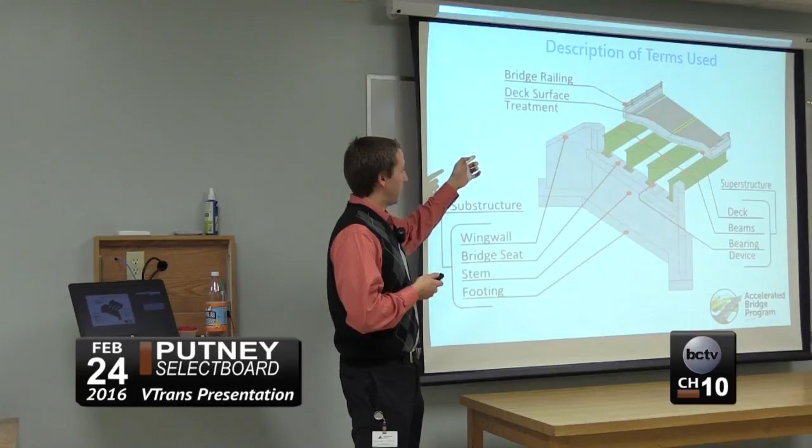We've got a diagram here that shows each part—hopefully the laser pointer works. So we've got our bridge railing, which we'll be discussing, our deck surface treatment, which is our pavement, our deck, and then our beams, often referred to as girders, which rest on bridge seats or bearings. All of that combined makes up the superstructure, which will probably be discussed at some point today. That rests in its entirety on the substructure, made up of wing walls, which will definitely be discussed, and then footings.

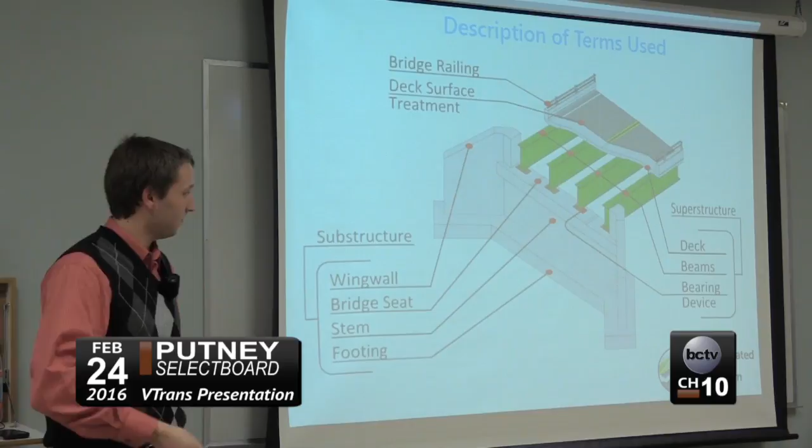If you have any questions, feel free to jump in and ask. Does the town-owned dam to the west have anything to do with the bridge structure at all? No, they're separate.

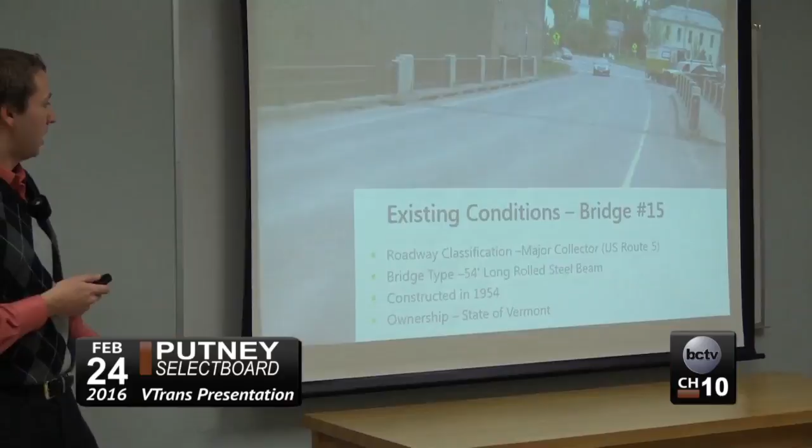So here is a view looking south over the bridge towards the Putney General Store and Kimball Hill. The existing bridge is classified as a major collector on US Route 5. It's a 54-foot long, simple span rolled beam bridge—that's just a standard girder type—constructed in 1954, and it's owned by the state of Vermont, lucky for the town of Putney, so no financial responsibilities, hopefully.

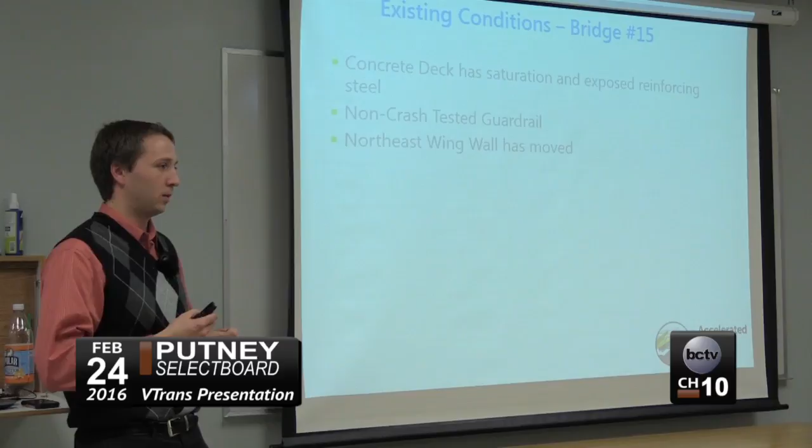The existing bridge is a concrete deck cast in place on the existing steel beams, and it currently has significant saturation and exposed reinforcing, particularly in the fascias. You may have noticed walking over the bridge that there are weep slots or holes in the curb, so any water flowing across the bridge just goes through the curb and over the side. Most of the deterioration and exposed reinforcing is on the outside of the bridge.

It currently has non-crash tested guardrail. I'm sure when it was installed in '54 it met all the design standards of that time, but we have much more stringent safety requirements now, so we'd like to bring that up to code. And then the northeast wing wall has moved—there's a photo, it's displaced 7 inches. It was cast on laid-up stone, and I think some of those stones might have rolled out of place a little bit, so that's something we'd like to address in this project as well.

Can you say what saturation is? Yep, I've got a picture of it coming right up. No, okay, so right here.

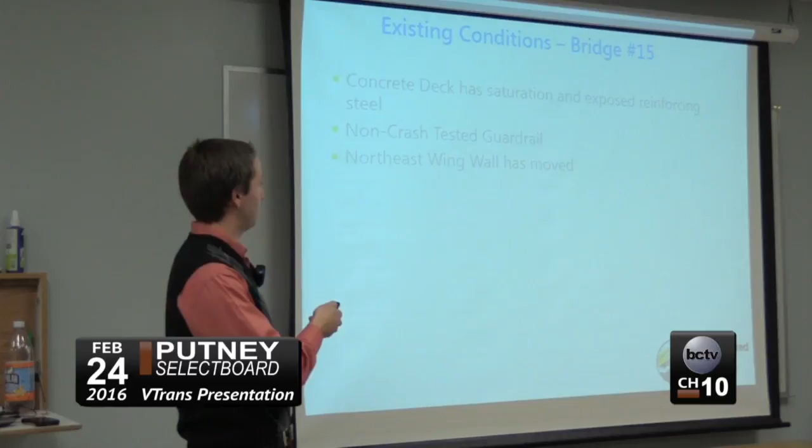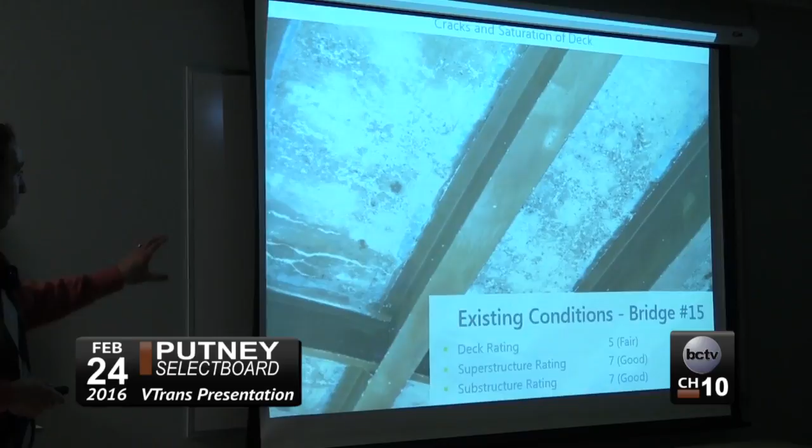All this white here in the concrete is efflorescence. The concrete has become saturated with chlorides and water, so the deck doesn't have the full integrity it once had. There's enough void space in the concrete that water can actually move through it, which is how these chlorides from salting the roads in the winter have gotten here.

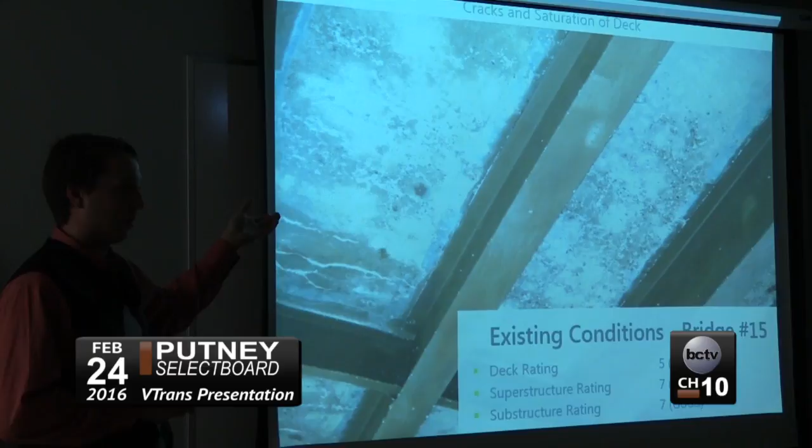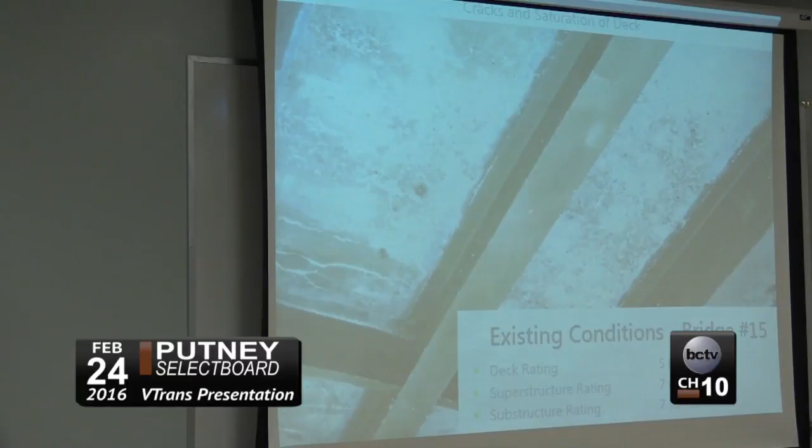An ideal deck basically doesn't allow water to penetrate through it. So if water's getting through it, those chlorides are getting to the reinforcing steel, and it's reducing the capacity of the girder or the deck.

At this time, you can see the beams look like they're in excellent shape, which is why this was identified as a deck replacement candidate.

We've got these ratings down here. Every bridge gets ratings - the deck, the superstructure, the substructure, the channel alignment, everything gets rated by our bridge inspection folks. A 7 is really good. A brand new bridge, if we opened it day one to traffic, never gets rated better than an 8. So 7 is good, 5 is fair. Once you get down to a 3, we're starting to consider closing. 3s are pretty bad, and a 2 would definitely be closed to traffic.

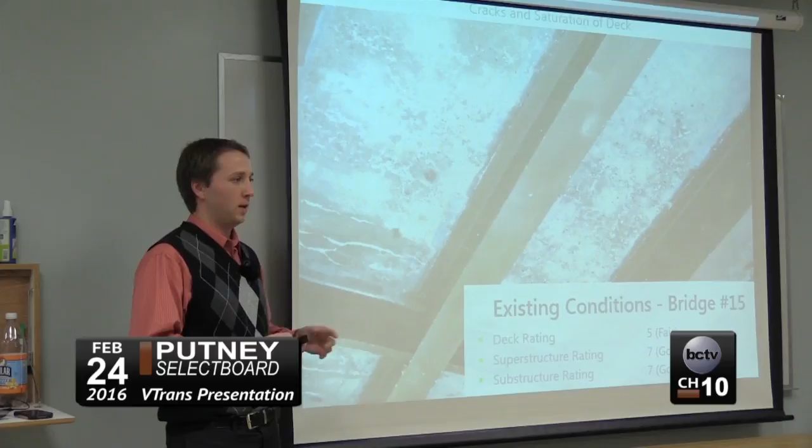So right here, we've got an opportunity to replace the deck and salvage the good condition of these steel girders still. If we were to allow this to continue, allowing chlorides to come through and penetrate the deck, those would eventually get onto the steel and start corroding it, and then we'd be looking at a much larger project than just a deck replacement, which would mean more inconvenience and more cost.

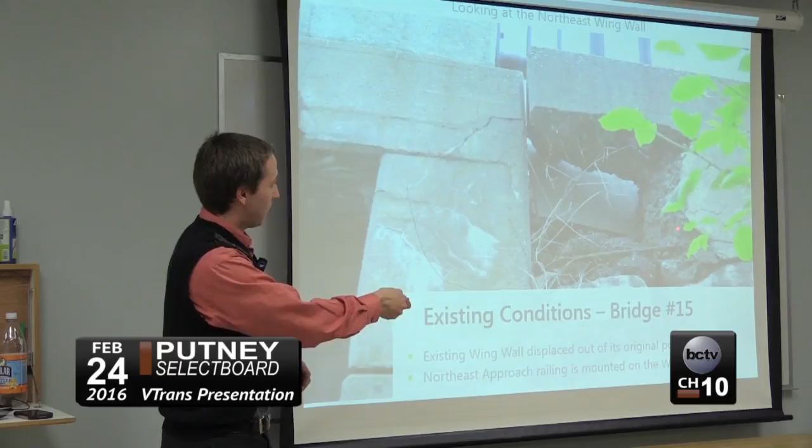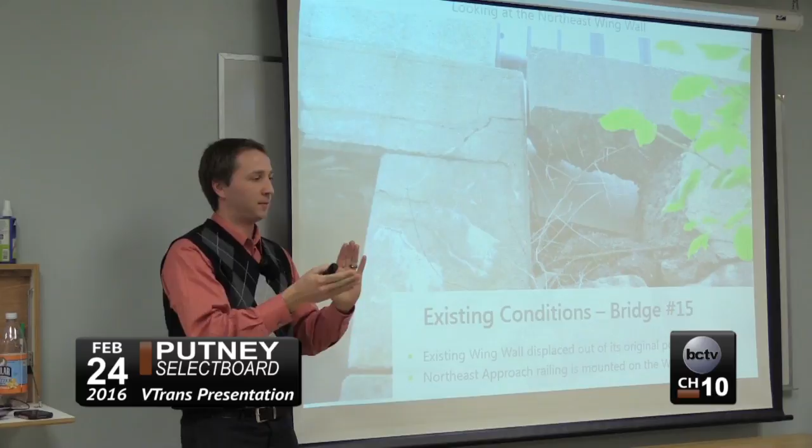So here's the wing wall that's displaced, and as you can see over here in the corner, it's cast on a laid up stone, and part of it's even fallen out. Up here, those were even at one point - the angle is a little bit deceiving. It hasn't uplifted at all, it's actually rotated out, and it was last measured in the most recent bridge inspection at 7 inches.

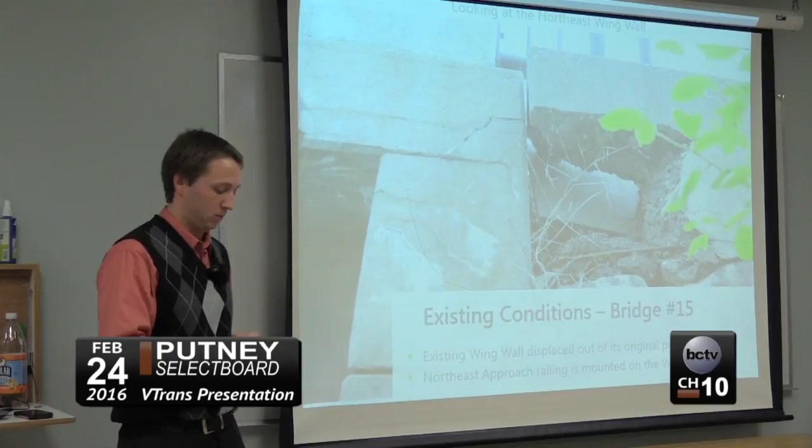And there is railing, I believe, cast on top of that - there's a metal tube railing right on top of that wing wall. So we'd like to fix that as part of this project as well.

So here's our resource constraint. This bridge has historic guardrail on it. As you can see here, the sidewalk and the actual bridge for traffic are two separate structures - there's a 1-inch gap between them, so they behave completely independently. We are only looking at doing work to the vehicular bridge and leaving the pedestrian bridge untouched as the scope of this project.

I don't know if I want to bring Kyle in just to say a little bit about the historic rail. I just want to mention something.

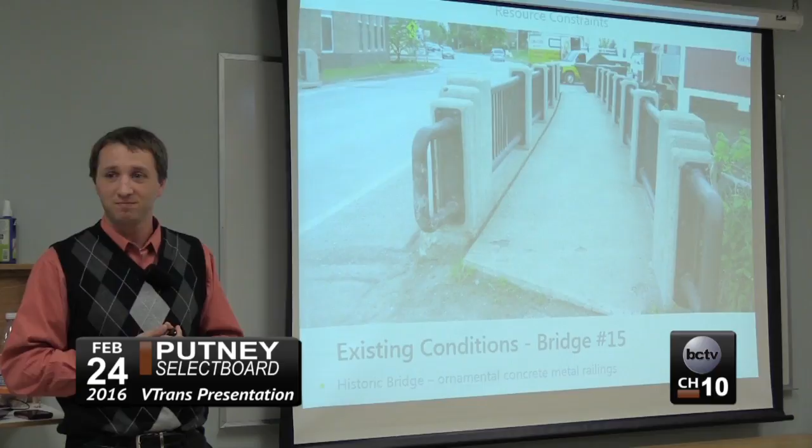Yeah, this bridge is very interesting - I haven't seen this particular railing design anywhere else in Vermont. But really, it's a good example of standardized bridge construction. In Vermont, beginning with the flood of 1927, there was kind of a shift towards standardized bridge design and construction. That trend carried on through the Great Depression and really came into full swing in Vermont with the construction of the interstate. This is just a great example of standardized bridge construction and railing design in Vermont.

Does anyone have any quick questions about the bridge itself, regarding its historic qualities, or anything I can answer right now? The railing is relatively original, as far as sort of 1954 railing - it looks pretty much unchanged from that '53, '54 standardized specification that was included with the original bridge plans. So as far as we can tell, it's pretty intact. When you look at the as-built plans of this, they're identical to what is shown for the original contract of the '53, '54, '55 construction years.

This talked about crash testing the rail - how is that done? So this would not be crash tested. Crash tested rails are built as a full mock-up, full scale. They actually drive a vehicle at a design speed, at an angle, into the guardrail and measure the performance of it - basically the dynamic deflection, and what happens to the car once it impacts the railing.

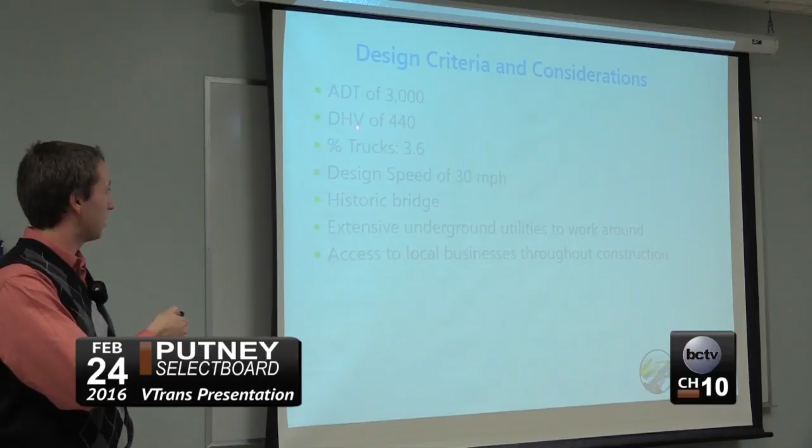So the design criteria that we've had to work with: the ADT, annual daily traffic, or average daily traffic, is 3,000 cars per day. Design hourly volume, DHV, would be the number of cars that travel over this bridge in the peak hour, which would be 440 cars in 1 hour.

The percent trucks is 3.6, it's probably all Soundview, it's all you guys, I'm guessing. I don't know how much more truck traffic there is. And the design speed is 30 miles per hour.

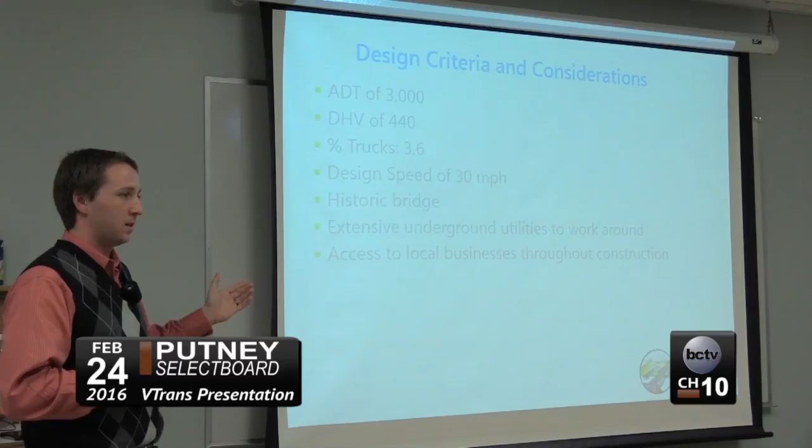Some of the things we've had to consider: this is a historic bridge, so we want to mitigate the loss of the historic railing as much as possible. There's extensive underground utilities that the contractor is going to need to work around, so we have to keep that in mind as we go through our scope. And we want to maintain access to all the local businesses throughout construction, which is really our biggest challenge.

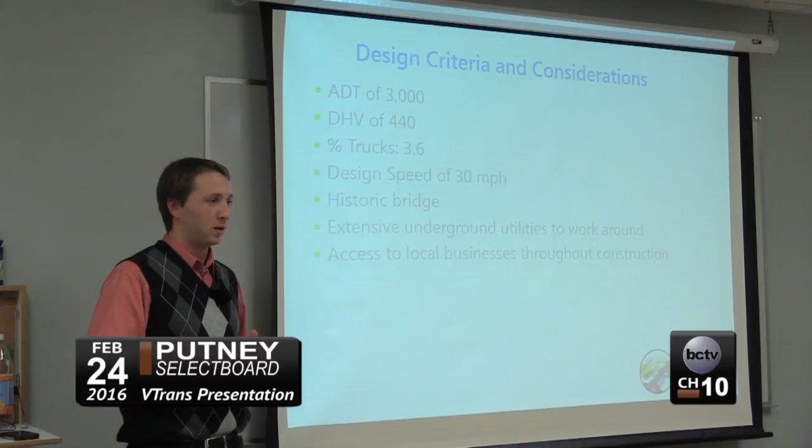So this is the number of cars you're building for, not the number of cars using the bridge right now? This should be the 20 to 25 year forecast. The forecast is almost identical to the current conditions, and I think the reason is the interstate—most through traffic is using the interstate, so the local traffic isn't expected to change a lot.

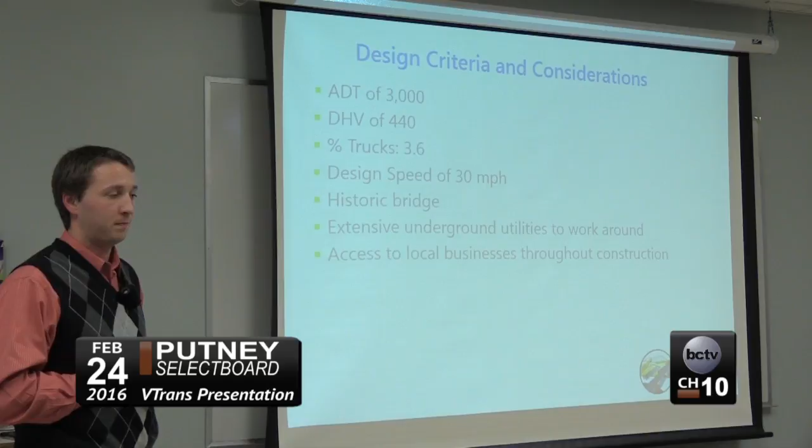Are you going to do any traffic counts of current traffic using Kimball Hill and Sand Hill Road? That's an excellent question, and we're going to get there. Once we get to maintenance of traffic, I'll start talking about that, and I'll hand it off to Jen for that part.

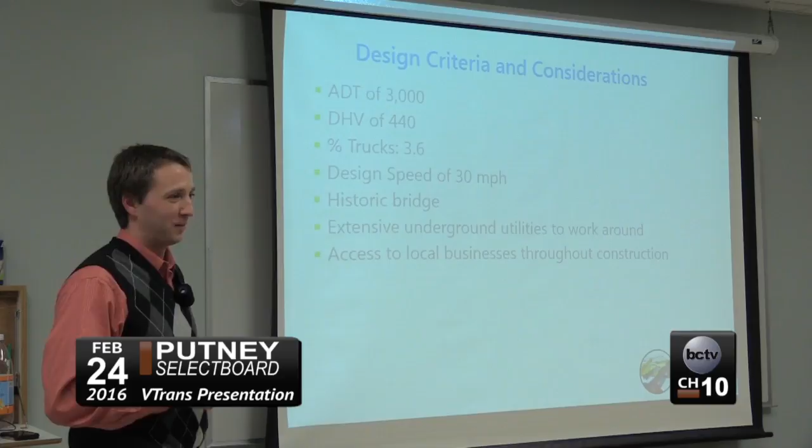So the alternatives we looked at were no action—just leave it as it is right now. How much more life can we get out of it? What are going to be the ramifications if we do that?

We already discussed that if we don't do anything, the bridge deck is going to continue to deteriorate, the chlorides are going to get onto the steel, and we're going to have a larger project in the future. There's likely to be some minor maintenance throughout the next however many years we leave that in place. So we disconsidered that option—we'd rather deal with it now and get the most longevity out of the rest of the structure as possible.

Deck patching: you've seen the photo of the saturation, there's really no place to start and stop. Some decks just have localized deterioration where you can patch one area and the rest is in pretty good shape, so you can limp it along for another 20 years. This one, in this condition, once you start demoing it, there's no good sound concrete to stop at. So this wouldn't be a good option. If we tried it, the repairs being adjacent to less sound concrete would just cause additional deterioration, and it wouldn't last very long—we're estimating about 15 years at the most.

So that left us only with a deck replacement option, as identified by our asset management group. The deck replacement option also includes the wing wall repair and the new concrete railing. So our recommended alternative, logically, is the deck replacement.

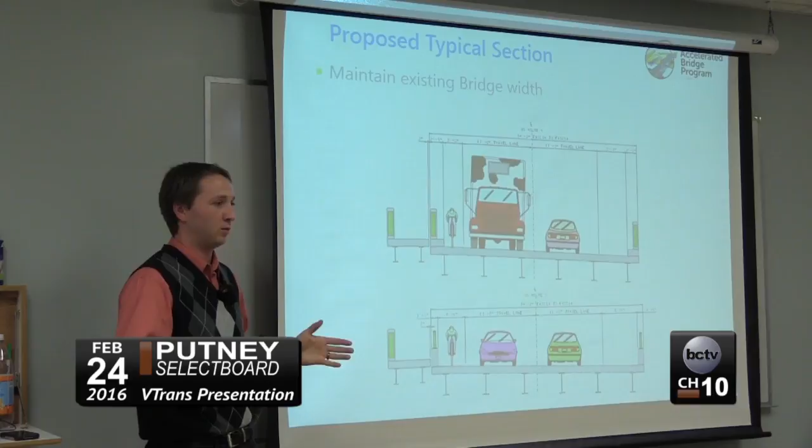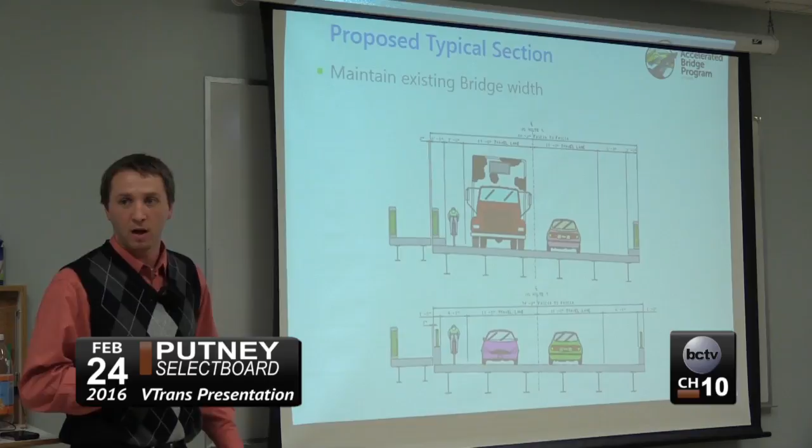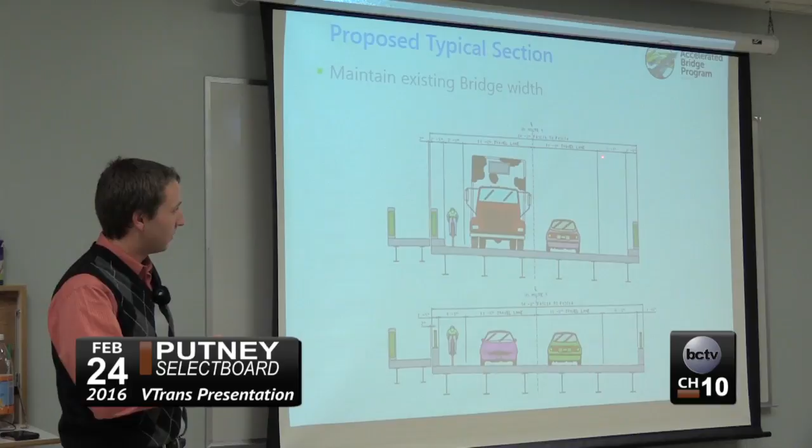This one would have a solid bottom concrete the whole length of the bridge, with parapets, and in between the parapets, full height would be steel tubing. We got some photos of that, he's gonna show you some pictures. But what that does is increase your shoulder widths quite a bit. If you maintain the 11-foot lanes, you go from a 3-foot shoulder to 4'1" and 5'1". This should be 6'2", I believe.

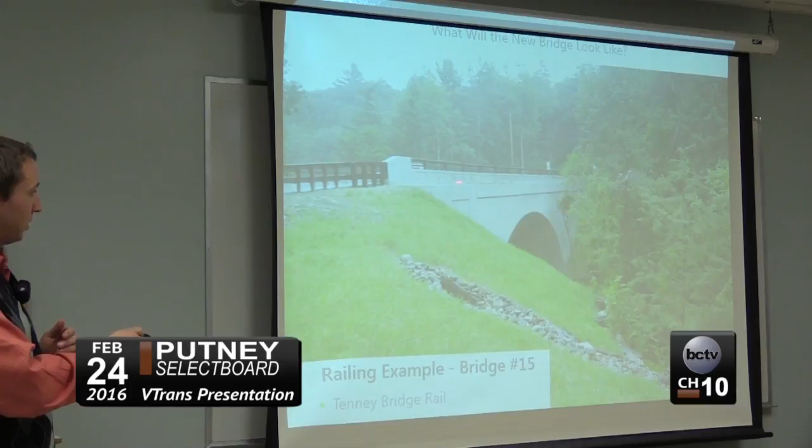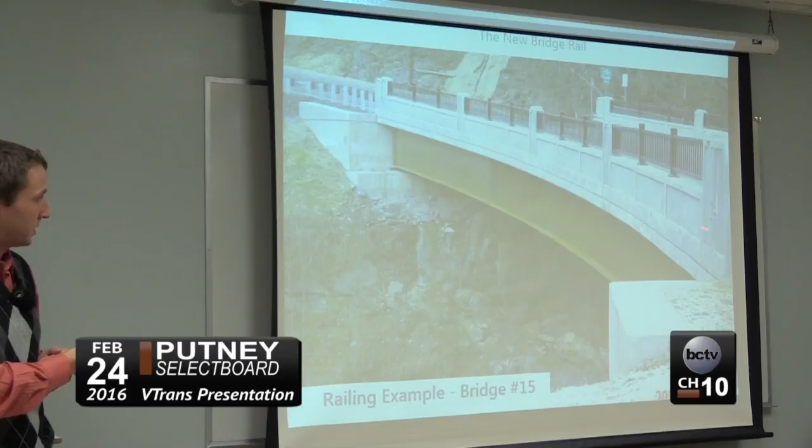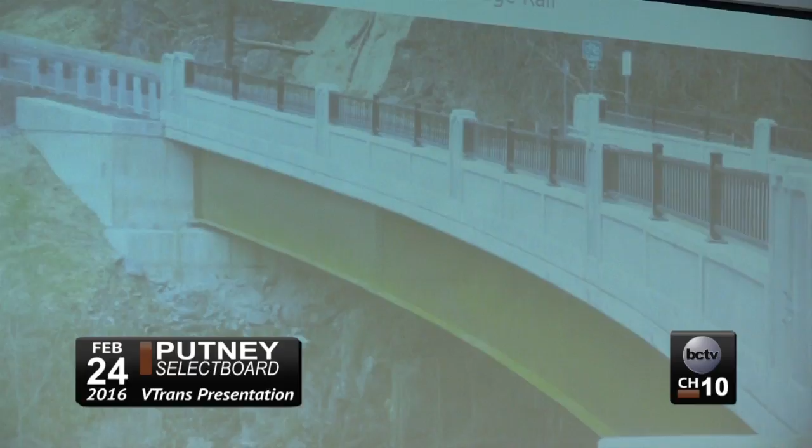And then another one, this one's got concrete parapets with the steel tubing. And then this is the one that we're proposing. So this one has got the concrete along the entire bottom, and as you can see, you've got the concrete parapets every, I believe it's 15 to 20 feet, and the steel, horizontal steel tubing with the vertical spindles. The reason why we picked this one is because we believe it most closely mimics the one that will be left intact, because it's got the combination with concrete and steel.

What's really important here is when we talk about crash tested, it's the concrete. You're gonna have to have the concrete on the bottom, you got no choice on that. That's what keeps you basically from driving out into the river. Once we get past a certain height, I think it's 24 inches of concrete on the bottom, then we can talk about adding a little bit of detail on the top.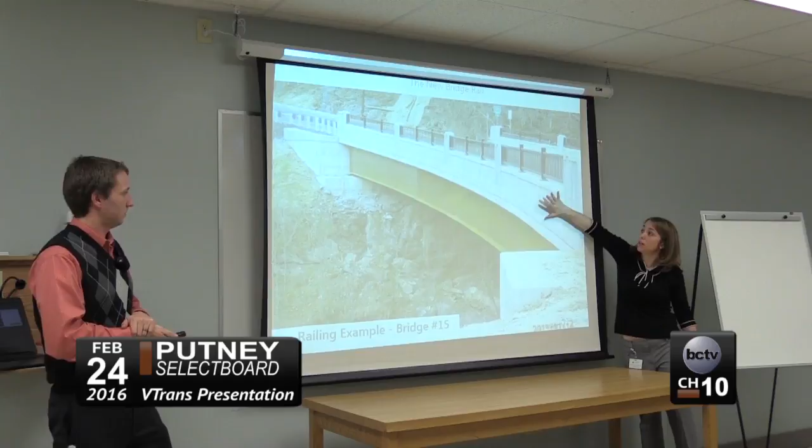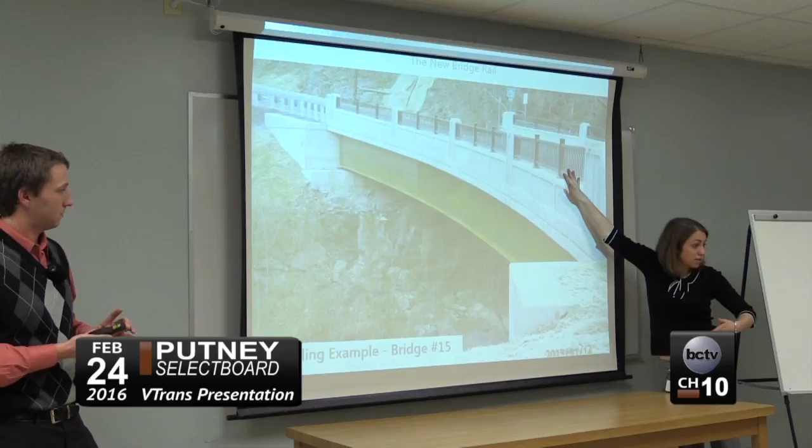That's basically, so what we like about this one - and Kyle can speak to this probably better than I can - is it still kind of mimics that concrete parapet that you currently have, and it also has that vertical steel rail, which is what you have. So again, we're trying to tie it in as much as we can to the existing rail that will be maintained, while providing you something that has the crash testedness down here.

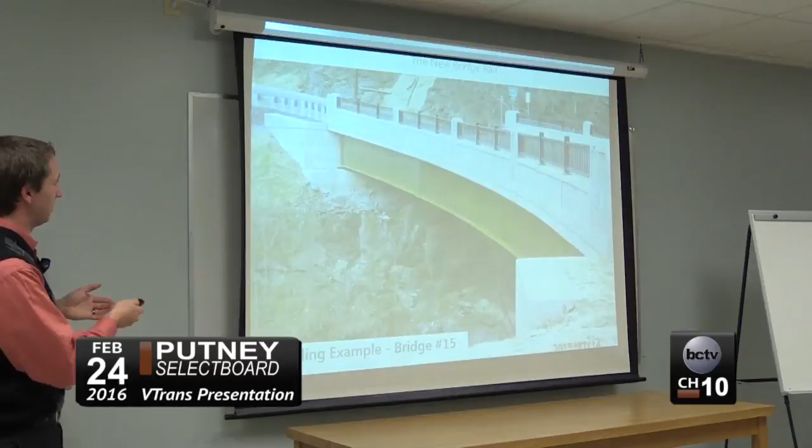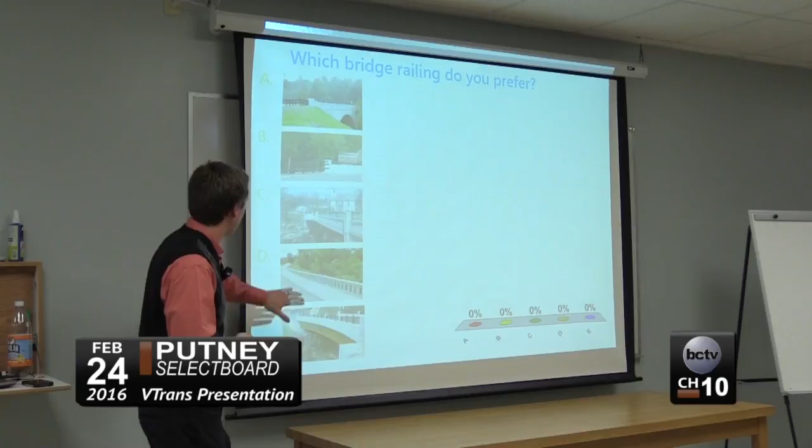So this is our preferred alternative, and we got a question for you after: which bridge railing do you like the best? Now, what's your preferred alternative there? Want to turn off the lights? I can turn the light off for a second.

Starts with A. E is the one that you're proposing - correct. And just so you know, we're not locking in any decisions here tonight, so don't feel like when you vote for something, that's it. Because one of the things that Historic Preservation is gonna do is they're gonna also check in with the town again, along with Rob, just to make sure that, yes, this is the rail we're moving forward with. So don't feel like once you decide tonight, that's it, and we walk away. But this at least helps give us some guidance.

This one's in Barre Town, and it's really nice, right by Booth Brothers. It's a very nice railing. It is a really pretty railing. No pressure - I think you talked them right into it.

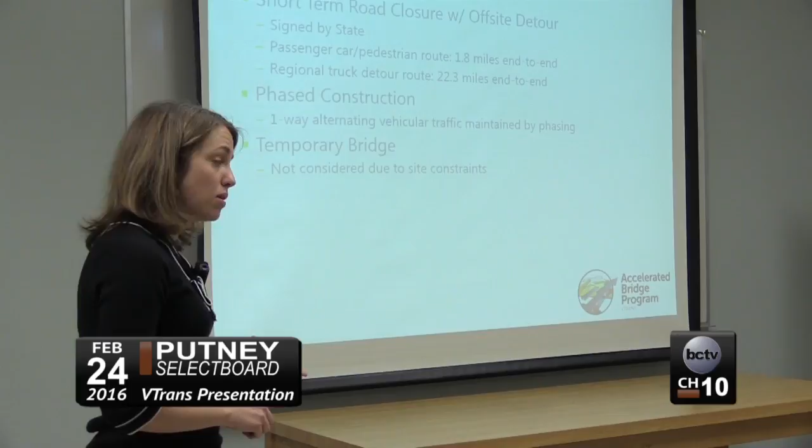So we usually look at three different options as our standard. Those are either road closure, which is our preferred alternative generally speaking, because what we try to do is minimize project impacts, which allows us to streamline project delivery so we deliver projects more quickly at a lower cost. There's sort of a win-win for everybody in that situation, but obviously closing the road is not an option in some locations, depending on how long the detour is, whether there's a local bypass.

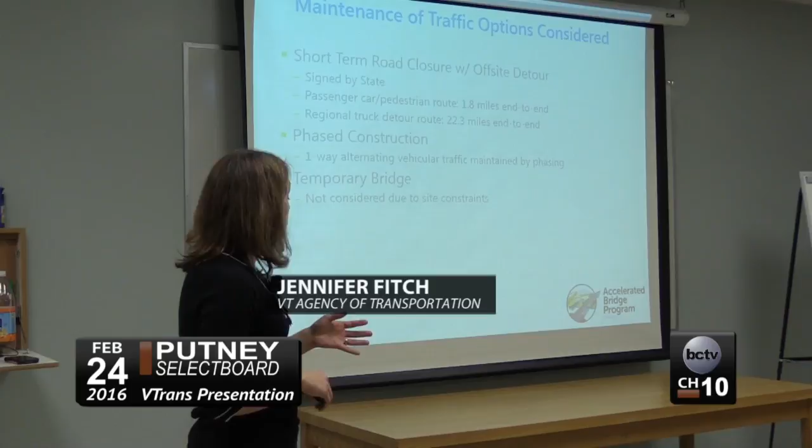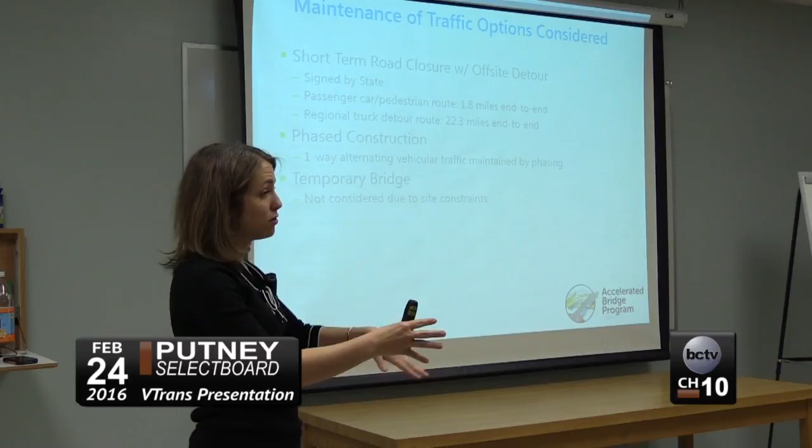Some of the things we'll talk about in a minute. The next thing we look at is phase construction. Phase construction is when we basically take out one lane and have alternating one-way traffic on the other lane while they demo and replace that lane. Then once this lane is back up and running, we switch traffic back over. Now we take this lane out while we have alternating one-way on the other lane and build that one, and eventually open the bridge to two-way, two-lane traffic.

Now the downside of phase construction is that it takes the whole construction season, because you're basically doing things twice. There's also a joint left in between those two lanes, which allows water and chlorides to get in more readily. So usually we see faster deterioration with bridges where we've done phase construction. It's usually the most costly option for us because again you're doing things twice and the contractor's here for about twice the length of time. So those are the reasons why we don't like phase construction, but there are times we have to do it because it's the only option.

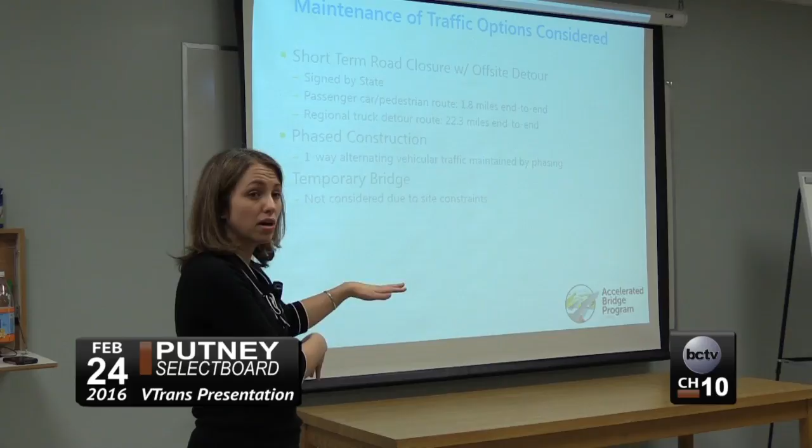The last option we look at is a temporary bridge, where you see a bridge right alongside the existing bridge. We close the existing bridge and reroute traffic onto the temporary one. In this case, we didn't even consider it, for two reasons. One, it's a very tight location—it would be almost impossible to fit a temporary bridge in here. And second, this is considered preventative maintenance, or preserving the bridge, so we're trying to spend less money now to extend the life of the bridge as much as we can. There's really no way to put a temporary bridge in here anyway.

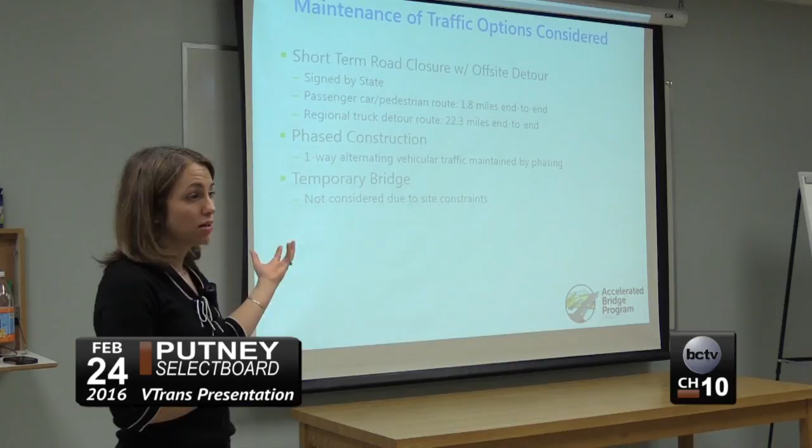So the first thing we looked at is a road closure. As Jonathan said before, we're going to be using precast deck panels—prefabricated bridge components built off-site. We truck them on-site and lift them into place. That allows us to build the bridge quickly; it's accelerated bridge construction, so we can get in and out as fast as possible. Right now, the maximum time we're going to ask from the community is 10 days.

One of the things Rob is going to do when he gets it into design is see if he can reduce the number of days down from 10. We're going to do that if we can. We start with a conservative estimate because we never want to come back to a community and ask for more time—we'd rather come back and say we'll deliver it in less time. So that's a conservative estimate. We're confident we can deliver it in 10 days.

We're also going to incentivize the contract. What that means is we figure out how many days we think it will take to replace the deck, and how many days the contractor, if really working hard, can build it in, and we incentivize him to open the bridge, say, one day early—he gets a 5% bonus on the contract if he does that. The Accelerated Bridge Program has been around for four years, and we've had a 100% success rate with opening all our bridges early, with contractors getting full incentive.

We're happy to pay the contractors more money when they're working hard to open our bridges early. They get compensation, and it's better for the public as well.

There is a regional detour route, which I'm going to show you, and then we'll talk about the local bypass that you were mentioning. Does that include the wing wall repair? Yes, it does, because that seems a little more of a can of worms than just a new deck.

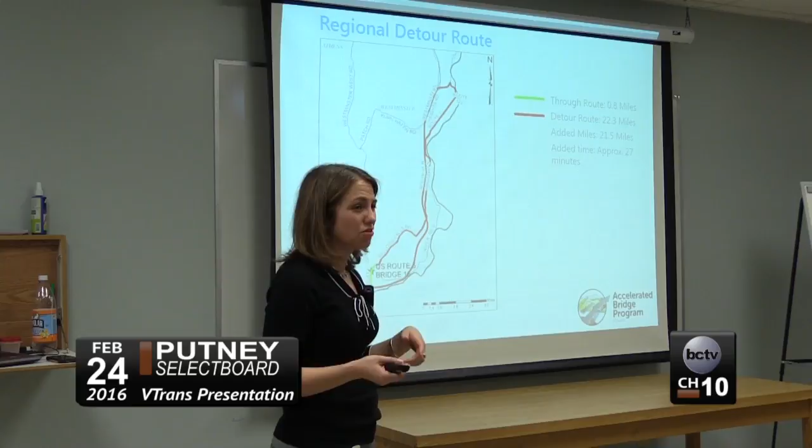That's something the community and Rob will work out during design. Currently, the way our contracts go out, there's a noise ordinance between 9 o'clock at night and 6 o'clock in the morning — they can't go over 75 decibels, which is actually pretty low. So usually at night, if they're working under that noise restriction, they're just kind of cleaning up the site, because there's not a lot of other work they can do without going over that noise ordinance.

So here's the regional detour. A lot of times we refer to the regional detour as the truck detour. We'll talk about that because we definitely do not want trucks using the town's local bypasses. In this case, the truck detour route is 22.3 miles, and it adds about 27 minutes to travel time. This is what I'd consider a moderate detour length for us.

We've certainly done longer detours than this in the state. The downside of the state of Vermont is we don't have a lot of roads, so unfortunately that usually means our detours are pretty long.

This is a moderate detour route, which we'll talk about as a potential local bypass. This is the one we looked at as the shortest local bypass in town. You can see it's Kimball Hill Road up to Westminster Road, Sand Hill down to US Route 5. Here's Basketville right here.

Did I say it wrong? Well, Sackett's Brook is... Sand Hill is that road right there. The road is Sand Hill. Oh, okay, I apologize, I'm not local. I'm not from here, you can tell.

Cynthia had a very good question: how do local bypasses work? So this is the answer.

We come to the town, and Rob will do this during final design or at contract phase, and he'll ask where you want your local bypass to be. We recognize, the state recognizes, that local people in the town are not going to take the 22-mile detour. We know that's going to happen. We will never sign the local bypass, we will never promote it. You're not going to hear anything about the local bypass from the state of Vermont, from our contractor, or from our project outreach coordinator. No one's going to talk about it, okay?

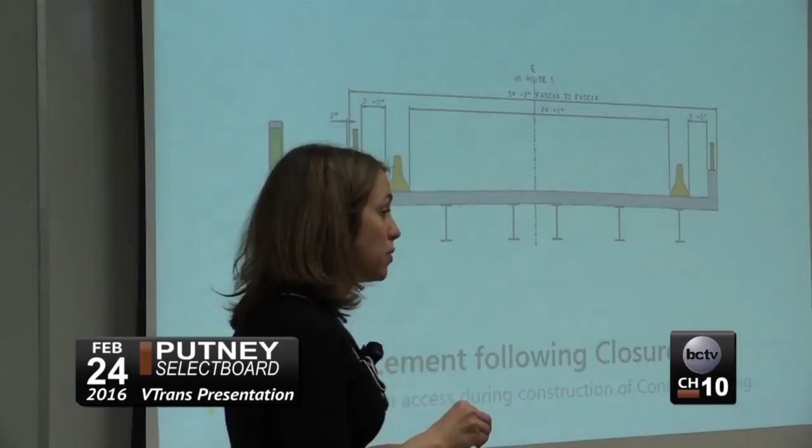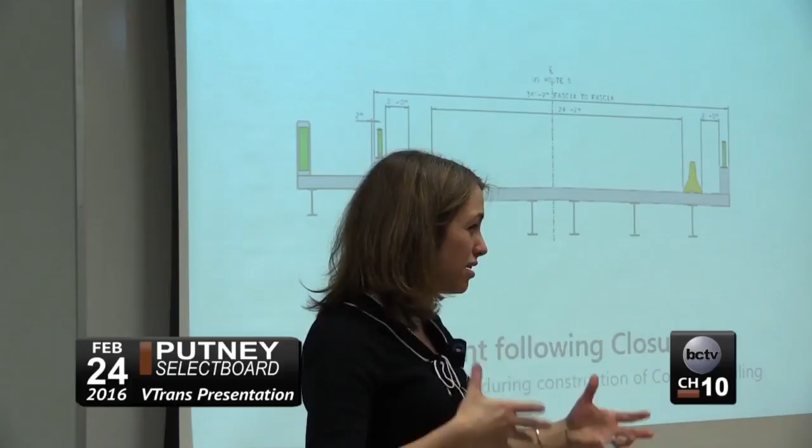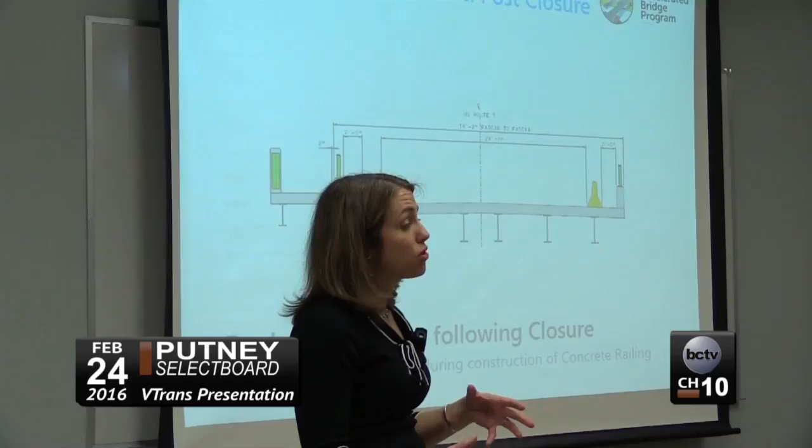One great thing I want to mention is how closures normally work in a standard project: we allow one-way alternating traffic for 2 weeks prior to the closure so the contractor can do prep work and get equipment into place. Then we close the bridge for whatever duration is needed, and typically allow 2 more weeks of alternating one-way traffic afterward to button up things on site that couldn't be finished during the closure.

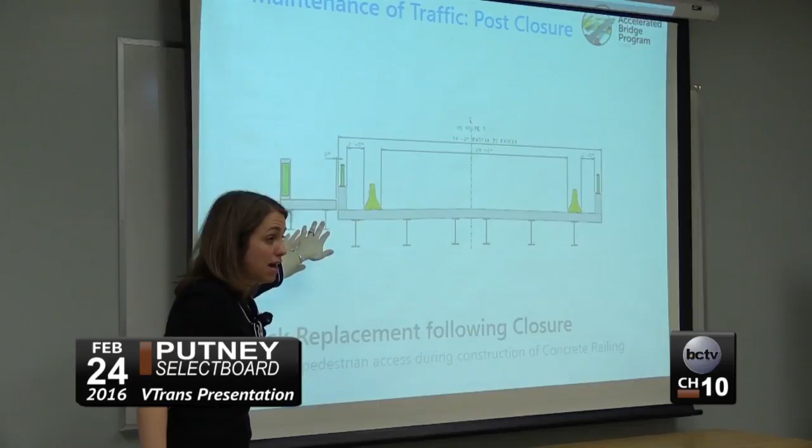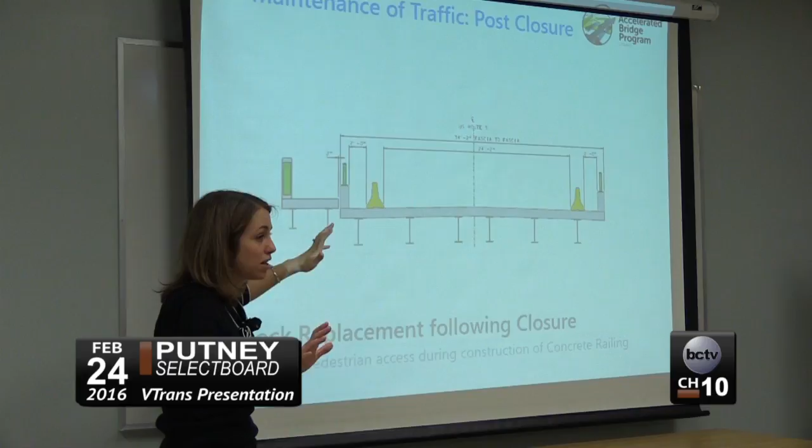In this case, all the deck elements will be precast, but the rail itself has to be cast in place because you can't precast it. We're on a curve—it's pretty, but it would be very difficult to cast that at a plant, bring it to site, and make the connection. So this will be cast in place, meaning the contractor will be around a little longer since he's doing this work while on site.

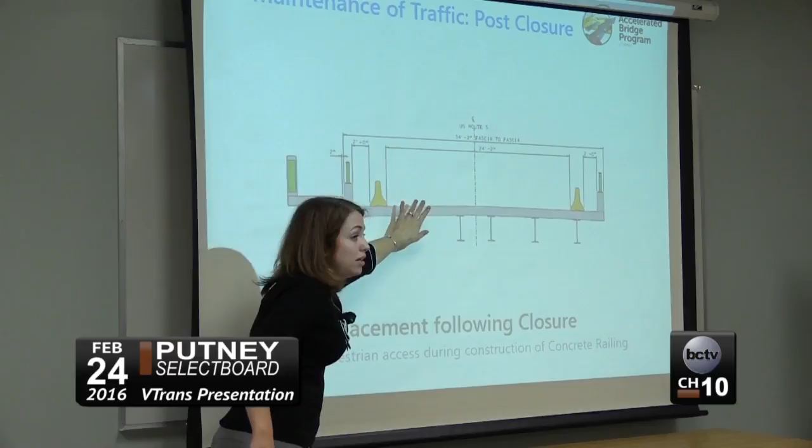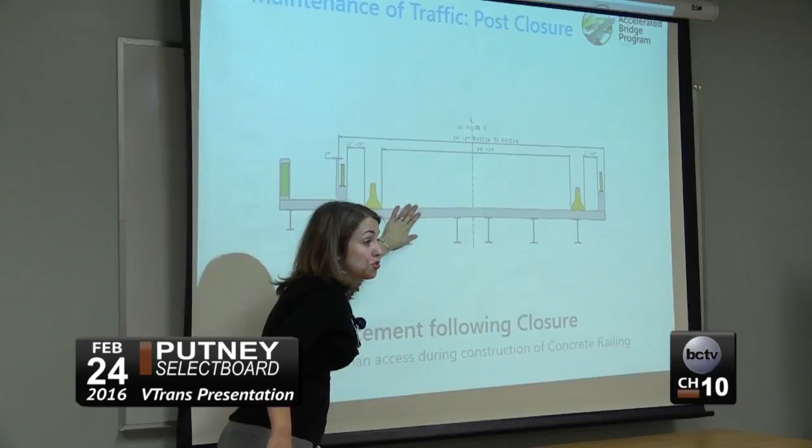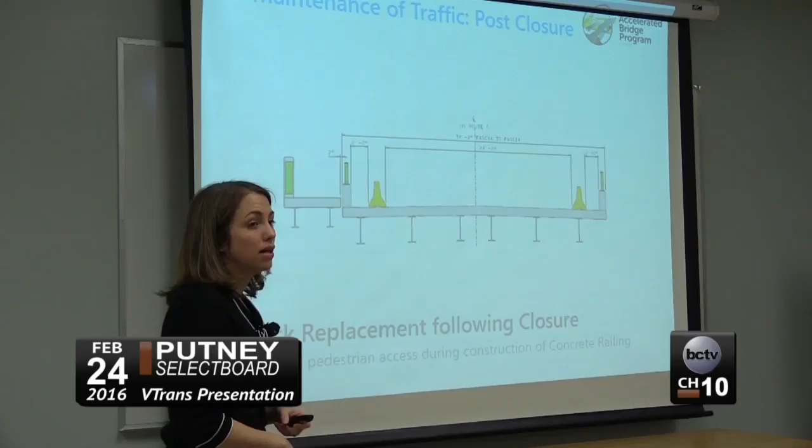However, we luckily have the width. The great thing is we can do the rail while maintaining two-way traffic, which is great because in most cases we can't—our bridges are too narrow to allow that. So we'll be able to open up to two-way, two-lane traffic earlier than we normally would. Rob may still need a little time at the end of the detour for alternating one-way, but I think we should be able to open to two-way pretty quickly.

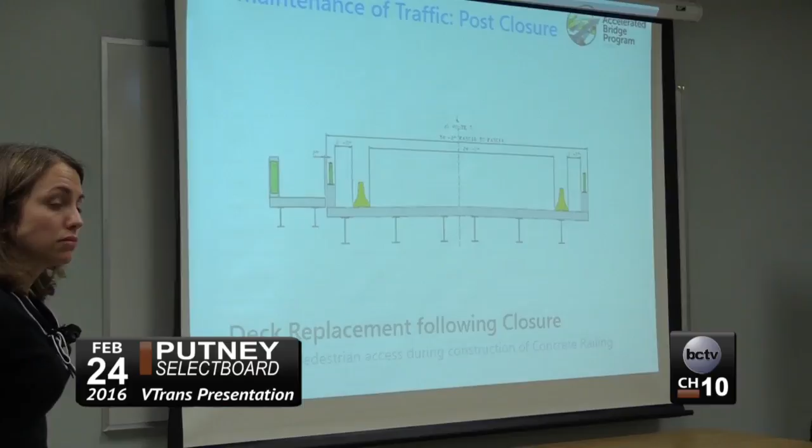I think the scope of this is pretty small. The 2 weeks before may be likely, but afterward I don't see much disruption. A lot of times we're doing other work, but in this case it'd be mostly 2 lanes after the fact—they could do most of the concrete work on the side. The day the concrete truck comes in there'll be a limited pour time, but minimal impact after. In most towns I can't say that, but in this one I can. So again, we're trying to minimize impacts.

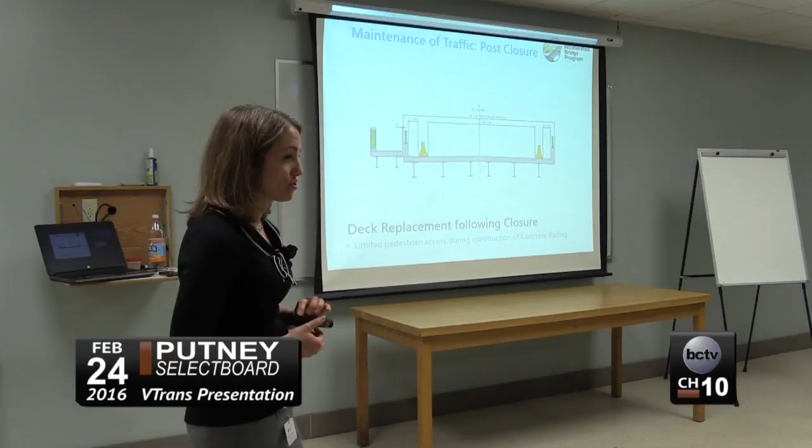Is foot traffic going to be allowed at all? That's a very good question. During the closure period, we are not going to allow pedestrians on the sidewalk, because it's a safety hazard. During demolition and placement of the precast panels, they're flying big pieces of concrete in the air. We don't want anyone walking on the bridge and getting hit in the head with a piece of precast—they'll die. We don't want that to happen.

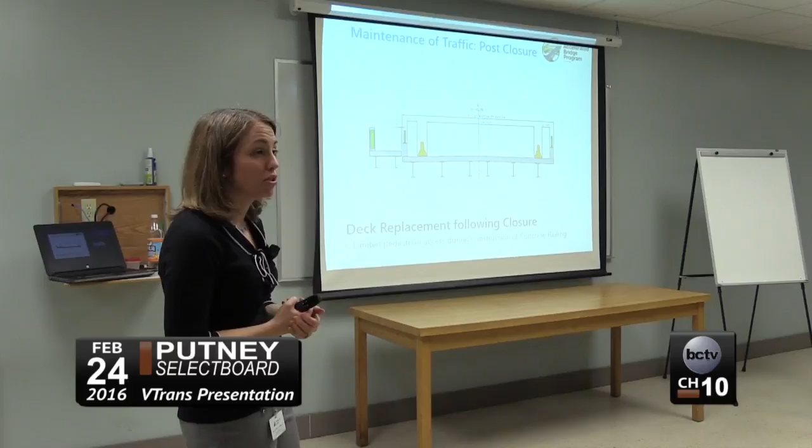So we are going to close the sidewalk for 10 days, but one thing we'll be doing this summer is the RPC doing pedestrian counts. If we find ped counts are high, we can provide a bus, or work with Landmark to fund a van to shuttle people around—especially if it falls during a time with students on campus. There are different ways we can mitigate pedestrian movements. It all depends on the usage data, which will help us figure out what we need to do.

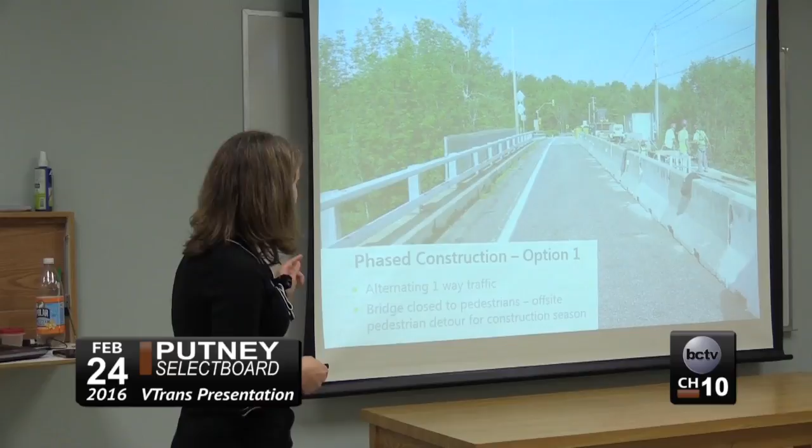I am going to show you phased construction as well, just so you can see what that looks like. You can see they've got this lane open for alternating one-way traffic, while the contractors work on the other side. This would be 2 phases. In Phase 1, traffic would be shifted over while they work on the other lane, and in Phase 2, this lane would be done—that's the one they'd be working on.

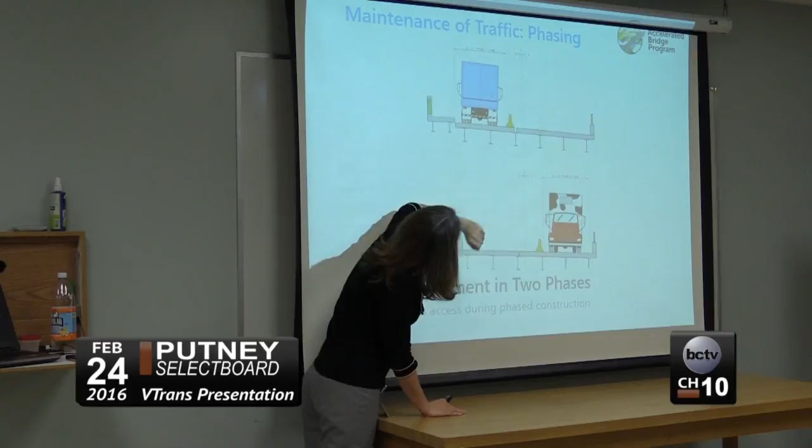So traffic would be on this one, they take that out, and they put the new deck in. Then the second phase is they would shift traffic over into the new lane that was just built, and they would be working on this lane.

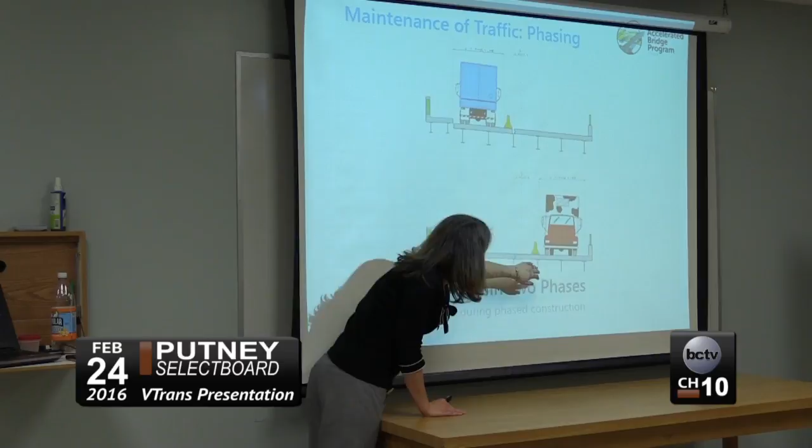And phase 1 would be challenging to allow for pedestrian traffic again, because you'll notice on the top table that we remove the railing in order to allow to get the trucks over there.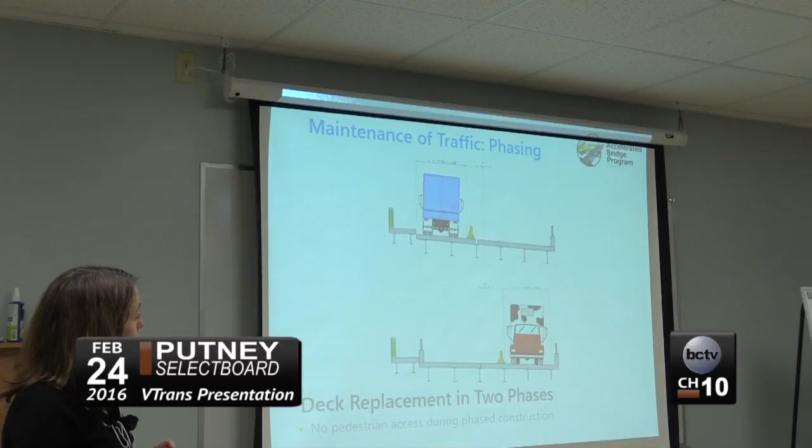One of the options we were looking at is putting the Jersey barrier on the pedestrian bridge, just as a visual aid and cue to keep trucks from getting over there. If we did that, that doesn't leave much space for pedestrians. So phasing, we would still have big impacts to the pedestrian traffic as well.

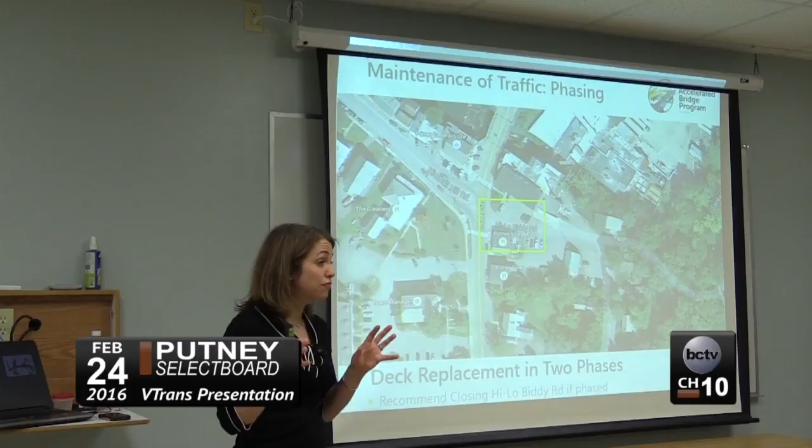The other thing we wanted to mention is with phased construction, now we have to control the flow of traffic over the bridge. In your particular situation, you've got an intersection on one side of the bridge, which does not make maintaining traffic on this side of the bridge easy, which basically means we have to have lights, and those lights are going to have phases, to allow one stream of traffic to move at a time. What happens is your light turns green, you go, and then the light turns red, but you still have to let that traffic clear before the other light can turn green. So there are delays associated with phased construction and with signals.

We would propose to close Hi-Lo Biddy Road during phased construction because what we're trying to do is eliminate as many turning movements as possible, because the more movements we have, the more phases we have, and the longer people are waiting for that green light, because we have more lights.

So we would propose to close this road, and then you'd have to have a signal for here, and you've got a signal on the other side, because you've got people on the other side of the bridge. So you're looking at multiple phases to try to move traffic in and out of that intersection and over the bridge, which all just means delays. It means you're sitting there in traffic, is what it means.

So here's a diagram of phased construction to show you kind of what it would look like. We did talk to Brian at Soundview earlier today. Traffic coming out from Water Street is going to be difficult no matter what we do. It's going to be really tight if we do phased construction.

I can show you the truck turning movements, I have them at the end, but basically they're going to be rubbing up against this rail right here, and there could be possible conflicts. He has to have a really good driver to not hit this rail. Same thing on this side, when we pull the truck through, he's going to potentially be rubbing on this rail as well, so those are considerations for that.

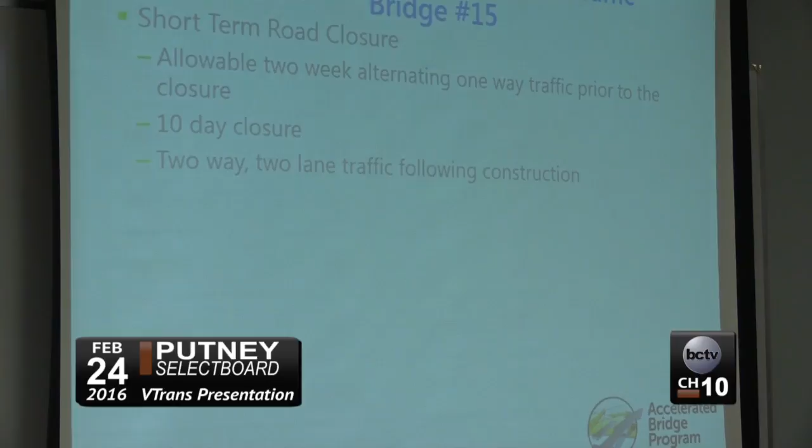So we're recommending the short-term closure because basically we want to get in and we want to get out. We want to get out of this town as fast as possible. You're going to want to get us out of your hair too, and we believe this is the best approach to the project. So again, we would allow potentially for that 2-week alternating one way, but Rob would work on that prior to the closure period. You'd have your 10-day closure, and then we try to open it to two-lane traffic as quickly as we can after the bridge is open.

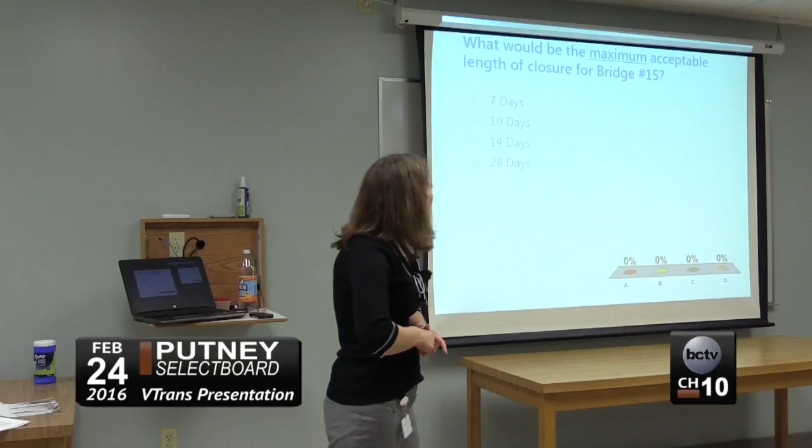So here's a good question for you guys. What is the maximum acceptable length of the closure period? I don't see a zero up there.

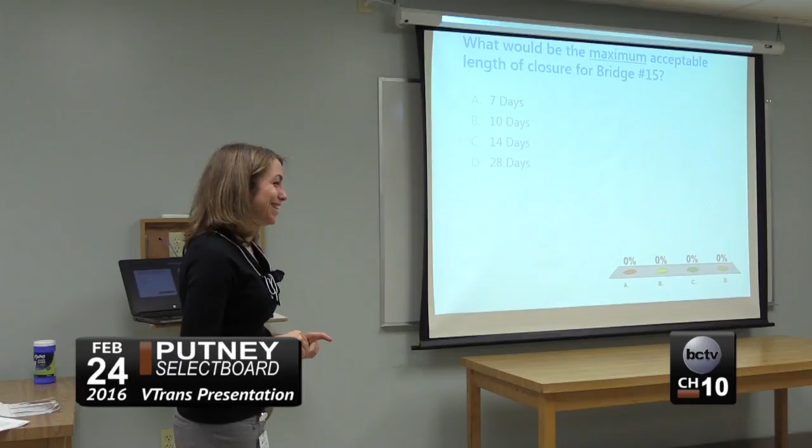I guess that's the prerogative of the person asking the question. We're gonna, feel free to ask questions or talk to us about concerns. And that's my concern. So you are, which owner again? Help me out. I have interest in 3, 7, and 8 Bellows Falls Road, Basketville, in that area. Okay, are you the one that was the owner of Basketville? Well, it's a family business. Okay, no, that's fine. I'm just trying to get an orientation again because I met quite a few people.

So I will show you the turning movements for both, I'll bring that up at the end. And again, this isn't locking anything in. This is just getting a feeling from the folks that are in the audience.

My concern is that probably 999 of 1,000 customers are coming north, and they're going to come to that bridge, and they're going to turn around and go back. Oh, so you're concerned about business loss? Oh, yeah. Okay.

That's a pretty typical standard concern that we get when we do closures. We certainly do closures in downtown all the time. So one of the things we didn't talk about is the closure period can really occur whenever the community wants to have this closure.

The nice thing in this case is we have no in-stream work windows because we're not getting into the water, which usually restricts us to July and August. The other thing is school buses also restrict us—a lot of school buses use the routes we're going to close, so we work with the school systems to figure out, could you take the local bypass? Are you willing to accommodate?

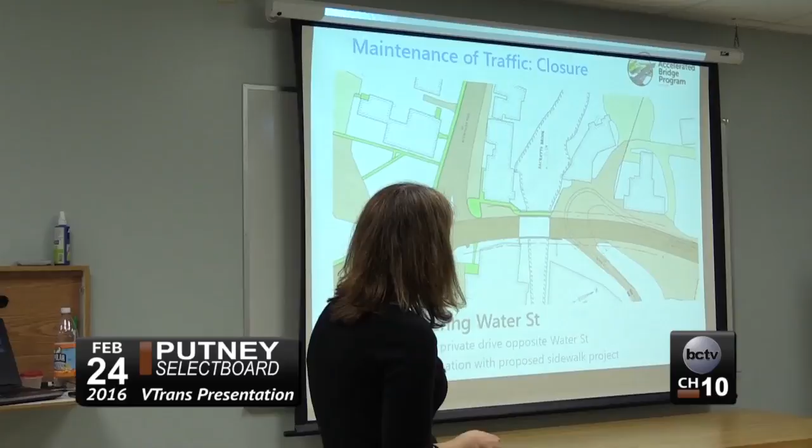These are the turning movements we modeled, using a WB-67, basically the largest truck we can model that's out and available. You can see as the paper company folks pull in, they have to swing into this parking lot and drive down. Same thing when they're pulling out—there'll be a slight impact as well.

Because the truck is pulling onto somebody else's property, there'll be right-of-way compensation for that. For the folks that occupy this building, we recognize there are parking spaces, so they will be compensated for that as well.

There's also a sidewalk project currently planned. If we go with the closure option, they're going to take the sidewalk part out of Putney's project and absorb it into our project, with the state paying for it—no match required from the town. So there's a little benefit: a free portion of sidewalk.

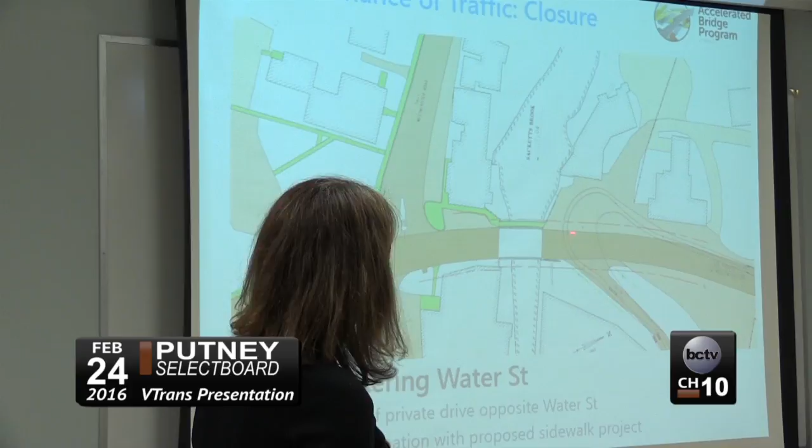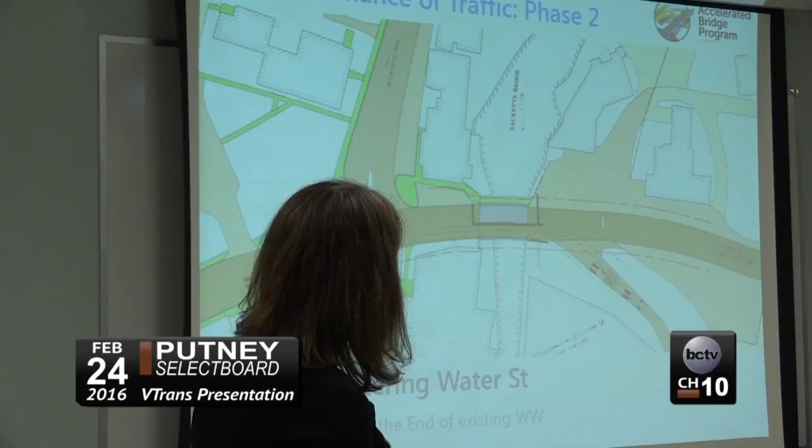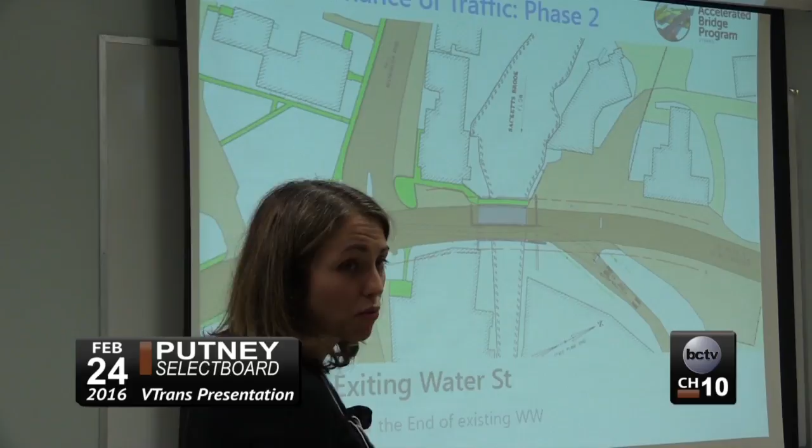Same thing when he pulls out, he's got the same issue rubbing right up against that rail. Same with the second phase—driving in, he's pushed up against that rail, and especially pulling out, he's clipping that corner. We're modeling this in software, so it's not necessarily ideal or perfect, but this is what we use to look at turning movements.

Can I add one thing—does this demonstrate that it's actually possible? This is a conservative truck. See that right there? The way it's modeled right now, it is not possible for phasing.

If we choose the phasing option, we'd have to refine the analysis and possibly make improvements to that intersection if possible. If we still can't get it to work, they would still need to make the big loop and do the detour—so even though the bridge would be open for the paper mill, they still wouldn't be able to use it because they can't physically fit through the phasing.

Hopefully they can—we think we can get them through. They could go out that way and turn around, maybe, down through it. But without doing a lot more detailed analysis, we can't be certain yet, and we haven't gone into that level of analysis until we determine the scope of work.

So the other thing is that if he can't get in and out with phasing, he's still going to have to swing into this parking lot, and these people are still going to be affected, whether it's phased or whether it's closed. Then you mentioned closing Hi-Lo Biddy Road. Correct. So if we go phased, we're going to have truck traffic that goes down Hi-Lo Biddy Road.

Because there are so many different merging streets here, and because we'd have to put in lights on both sides, and we have to let different traffic flows go at any one time, we're proposing to close Hi-Lo Biddy Road, which is this one right here. That one, the Liberty one. Okay, because that would be one less turning movement, one less traffic stream that we have to allow to go through.

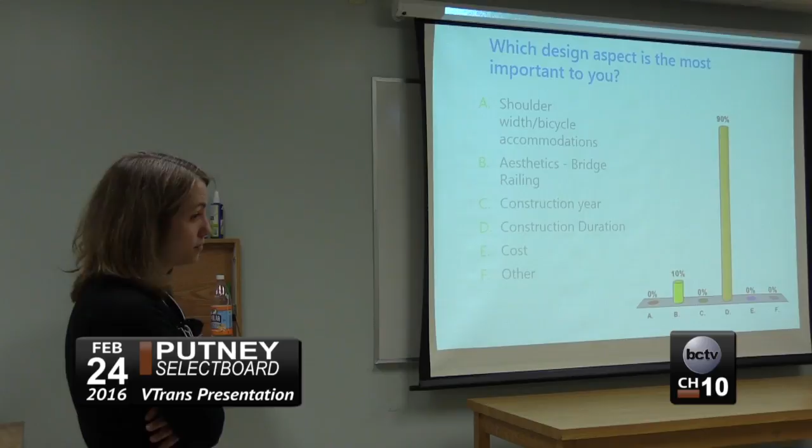Is there, I'm trying to picture it right now, but is there a way of just lowering a temporary pedestrian bridge somewhere on either side of that?

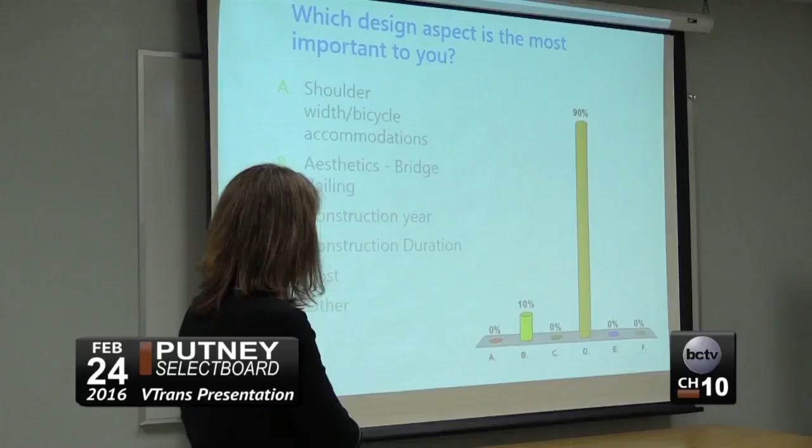I can't, no, to the west it would be. But we can, like I said, if pedestrians, if we have a lot of pedestrian access, then we'll figure out a way to get a bus to bus people around. That is federally eligible.

Okay, and did you find this presentation to be too technical, too simplified, just about right, or not much use at all? It's okay, you won't hurt our feelings.

You ask us after the bridge is done.

Yeah, actually, we're going to start doing customer surveys on every single bridge project, starting this summer. We piloted in the last 2 summers, but we're going to do it on every single project, including, I assume, Brattleboro Design Build. So you'll get an opportunity. When that opportunity comes, I can't tell you that, but there will be an opportunity.

Okay, there's two more questions. How did you hear about the meeting? We're trying to learn a little bit more about that, because getting out the announcements is really, really hard. That's one of the most challenging parts of my job, trying to let people know about it.

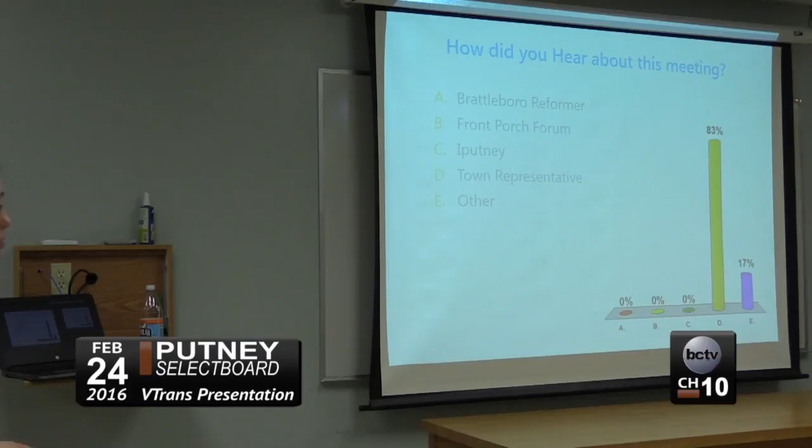It's deck and maintenance of traffic.